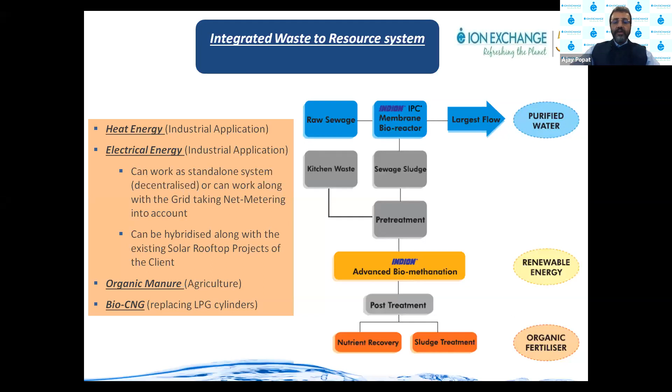You would have a substantial portion of renewable green energy through the biomethanation process integrated in this treatment technology, and whatever is the residual is rich fertilizer. I qualify it as rich in terms of the amount of nitrogen and phosphorus content in this residual. The energy could be heat energy used for industrial application, or it could be electrical energy. And this is how the whole concept is applied.

Let me take you through the salient features of each component of the integrated waste management, beginning with the IPC, the integrated permeate channel membrane.

It's an innovation in MBR technology as it combines the advantages of flat sheet and hollow fiber membrane systems while eliminating the disadvantages of the classical flat sheet MBRs. The disadvantages were that they were not backwashable, their packing density was less, and their operating flux rate was no different than hollow fiber or any other MBR used. This put a serious limitation on what was otherwise its strength area, whereas compared to hollow fiber, it was much easier to operate and maintain in a very difficult regime in which it was applied.

So it uses a first fully backwashable membrane, which can withstand a delta P of more than about 2 bars. Like all MBRs, it's extremely compact, requiring significantly lower area compared to conventional MBR because of the high flux rate this membrane system offers. And of course, like all MBRs, it is available in a modular design.

So the key features of this IPC flat sheet are improved fouling resistance, and the flux yield is significantly higher than conventional flat sheets - almost about 100% more. So if one designs an MBR to treat sewage with a flux rate of about 25 LMH, our experience in the field has been that you can easily design the systems at about 45 or 50 LMH.

Once the sewage is treated, and if you take the sludge - and that's where we want to treat the sludge coming out of a sewage treatment process, it need not be from an MBR, but in this concept we have integrated MBR along with treating solid waste - the sludge which comes out of the sewage treatment process, in this case IPC MBR, is then combined together with the organic kitchen waste. So this is segregated organic kitchen waste, and the homogeneous slurry, after pre-treatment, is fed to a unique anaerobic digester.

This is a solid digester where the organic solids are degraded through a series of biochemical reactions common to anaerobic processes, beginning with hydrolysis, acidogenesis, acetogenesis, and methanogenesis. The difference here is that this is a solid digester with an extremely high organic volume loading rate, and it can tolerate solids from about 12 to 16%. This is the unique differentiator in the digester design.

One can produce methane or biogas with a methane concentration of 65 to 70%, and subsequently the gas can be cleaned to reach up to about 90%, or even up to about 99%. And the digestate is a rich fertilizer.

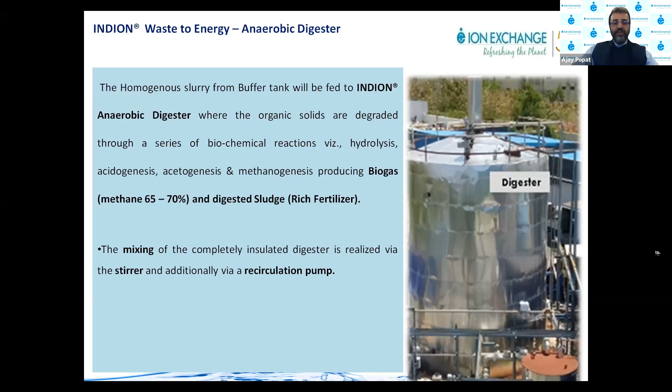The biogas generated by treating sewage sludge, or even sewage along with the organic kitchen waste, is stored in a biogas storage tank or a balloon. One can use additional moisture traps and H2S scrubbers to remove the corrosive H2S in case the biogas is going to be used for power generation.

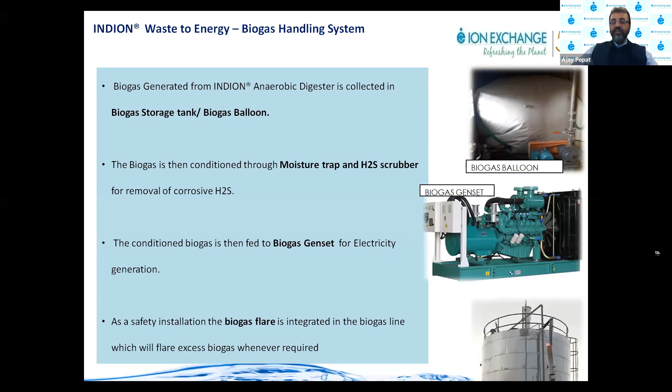It is then fed to a genset for electricity generation, like any other anaerobic waste treatment to electricity production. And all the safety required, in terms of biogas flare and automatic flaring of excess gas, is all built into the design of this system.

Integrated with this liquid and solid waste treatment is the odor control system, which is also completely automated. It captures the foul odor which comes during the transfer of sewage, solid waste, or sewage sludge, in case you want to use sewage sludge along with organic kitchen waste. So the whole environment laden with foul odor is completely insulated from bad smell during the process and operations, by capturing all the odor into an odor control unit, which works on a simple principle similar to how we work with biomass in attached growth processes, in an activated sludge process or an MBBR. This media is where the biomass is grown, and as you'd see, the odor-containing air is induced along with water and sprayed over the biomass media, where complete destruction of the odor-causing compound takes place.

This is also very widely used to treat VOCs in case of industrial effluent. So the system comes integrated with a ventilator, a scrubber, an air distribution system, a biofilter, and a complete control panel. So like the IPC and like the INDION anaerobic digester, this is also a completely automated system.

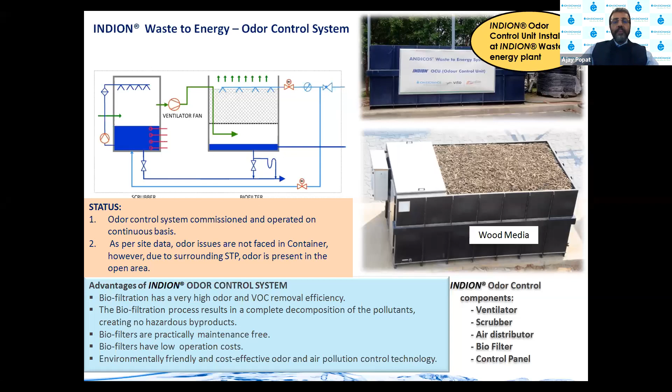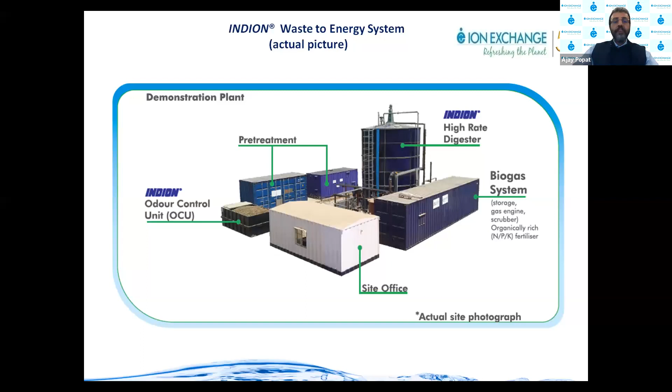Installed and working for the last 2 years, the features of this demonstration plant: it can treat sewage sludge of about 100 liters per P equivalent per day. It can treat kitchen waste equivalent to 300 grams of P equivalent per day. And the sewage sludge output from this amount of treatment is roughly about 2,000 to 6,000 kg per day, or 2 to 6 meter cube per day, with 1% consistency.

So you don't require to de-water this sludge. This unit accepts organic kitchen waste of about 900 kgs per day. So 2 to 6 tons of sludge with 1% consistency from the treatment through IPC MBR, and about 1 ton or 900 kgs per day of kitchen waste. This combination produces 65% biogas, almost equivalent to about 10 Nm cube per hour, converted to a gross electrical output of 20 kilowatts per hour, and a digested sludge or fertilizer of about 493 tons per year.

These figures are important because while we are recovering resources while treating the waste in an integrated way, these become very important outputs in terms of calculating the payback on such investments. Because at the end, we would also like to address the importance of recovery of investment. With this sort of recovery, and for this size of plant and multiples of this particular plant, the payback of the system easily happens in about 5 to 6 years, depending upon the cost of electricity, etc. Generally for waste management, we do not look at paybacks because our primary objective is to treat the waste in order to meet the standards laid down by the authority, and to have a sustainable practice in our operations in whatever way we do. But still, the technology had to be conscious about the payback, and I'm very happy to say that it gives a very attractive payback on the investments.

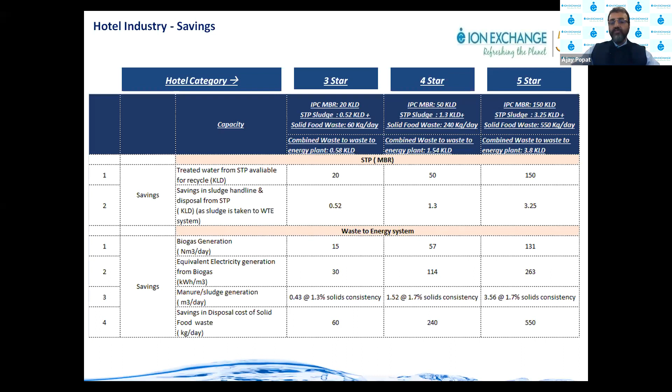And of course, there is a saving in terms of disposal cost of solid food waste. So when you apply all these savings to the investment on the integrated waste-to-energy process in the hotel segment, the payback is anywhere between 4 to 6 years.

A similar case study is also done for residential complexes with 200, 300, or 500 flats, each occupied by about 5 people, generating in a 200-flat complex close to about 100 KLD of sullage and sewage liquid waste, and close to about 240 kgs per day of organic kitchen waste.

Similarly, in a 300-flat condominium or residential complex, one would generate about 150 KLD of sewage and sullage, and the combined waste-to-energy plant requirement would be roughly about 4.46 KLD, and so on for the 500-flat condominium or apartment.

So these are the figures in terms of savings: recovery of water, savings in disposal cost, savings in electricity production, and savings in solid waste discharges. Once again, in the case of hotels, here also the payback comes within about 3 to 6 years.

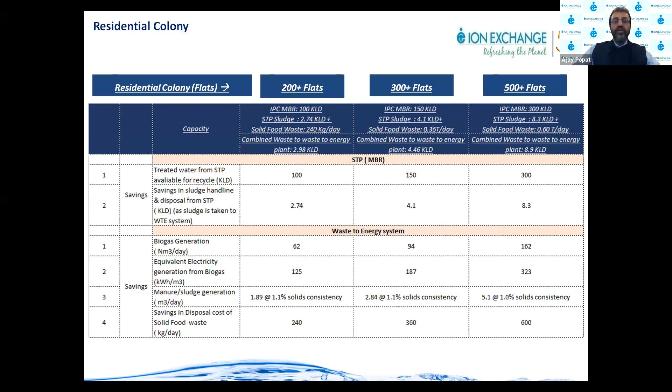In fact, it's about 1 year lower here because of this. So this is the way one can manage holistically both solid waste and liquid waste, and it provides a payback on the investment, apart from meeting the goals of sustainability, not only by treating waste but also by recovering resources.

So waste is the new gold, and thank you very much for listening to this wonderful concept that we have put up now commercially based upon our 2 years of demonstration, which any one of you who wants to visit, subject to COVID restrictions, can just write to us and we can organize your visit to this unit, which is still operated and maintained by us.

I'm going to present to you today on closed circuit reverse osmosis, or in short, CCRO. This is a new company we have recently acquired. It was a startup just 5 years ago, and now it is part of the DuPont Water Solutions umbrella. Let me briefly introduce DuPont Water Solutions. We are a component provider for RO membranes, NF membranes, ion exchange resins, ultrafiltration membranes, and some new additions to our toolbox are MABR, or membrane aerated biofilm reactor, MBR, which is membrane bioreactor, which Ajay was just talking about, and then we have the CCRO technology, or closed circuit RO technology.

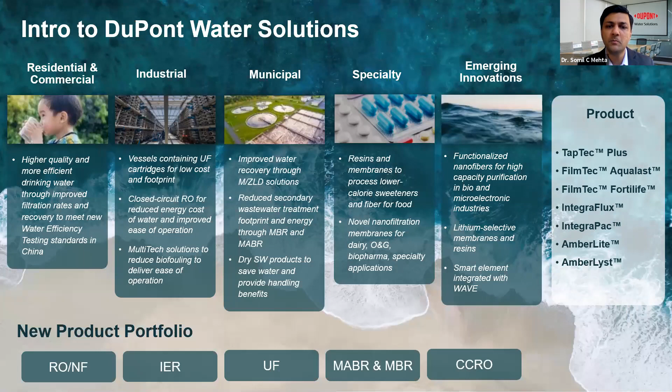Today we will specifically speak about CCRO and how it changes the game in the reverse osmosis process. I will be a little provocative today in my agenda, where we want to see why this particular technology changes the game, how it is different from conventional RO, and what benefits it actually brings to end users like many of you. So let us jump straight into the technology without any further ado.

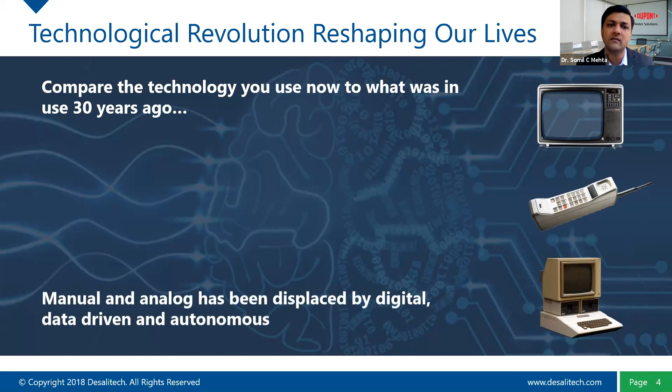If you look at the technologies around the world, there have been several innovations in the last decades. Earlier we used to use a telephone, and a huge television which was a cubicle box. Back maybe 20 or 30 years ago, there was only one channel, Doordarshan. Today, even some existing service providers that give you a regular channel are getting out of the game, and now we have Amazon Prime or Netflix and these types of revolutions coming in, where users can do whatever they want at their will and at their speed. But when it comes to reverse osmosis technology, are we really still stuck in the conventional way?

If you look at the reverse osmosis on one side and the concept of a refrigerator on the other side, what if you have a reverse osmosis plant that you just switch on and never have to worry about until it is broken? Today, we have so many headaches managing a reverse osmosis plant. Whether we have done a CIP properly, are we maintaining our recovery properly, are we monitoring our parameters properly, is there any fouling tendency in our water. The list can go endless.

But what if there is an automation or technology that will do everything on its own? All you have to do is switch it on and then monitor the system on a computer panel. The system will automatically adjust. You don't have to do anything. You just set the parameters you wish to have, and it will operate automatically until its life is over. Does it look like a dream to you?

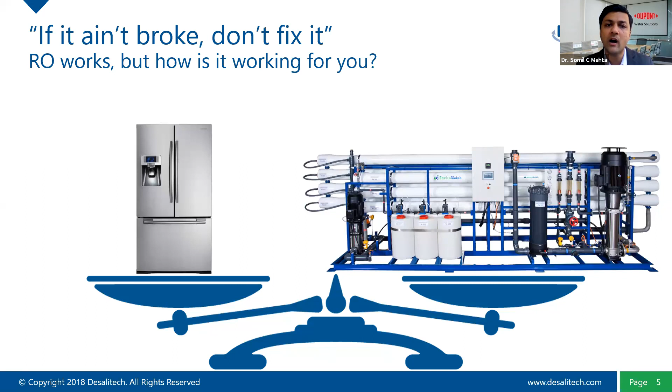But it is not. Let me assure you. I think the technologies are here today which can help you achieve that. So I'm going to show you how it is done and what are the benefits it will bring to you.

Eventually, if you're operating the system automatically, you can define what kind of recoveries you want, and the system will bring you that recovery. You're not stuck to the flow parameters in each stage. So one stage you can only take 50% recovery, second stage only 75% or 80%. You're not stuck to those kinds of boundaries anymore. You define 90%, 92%, 70%. Of course, you have to be judicious about the overall salt solubility and thermodynamic limitations. But what we can show you here is that the system limitations can be removed.

So now you can reduce the water consumption. If your feed water is very valuable, you can do that. If your waste management is an issue, now you can reduce your wastewater by a significant fraction by achieving a very high recovery. The overall process, if you look at the conventional system with the same kind of recovery and this CCRO system with the same kind of recovery, you will see a dramatic energy reduction.

The energy reduction obviously depends on the nature of the system you're operating in. If you are using brackish water, very soft water, the amount of energy saving will be lesser because the pump energy isn't required so much. Whereas if you go to the seawater side, the amount of energy saving is tremendous.

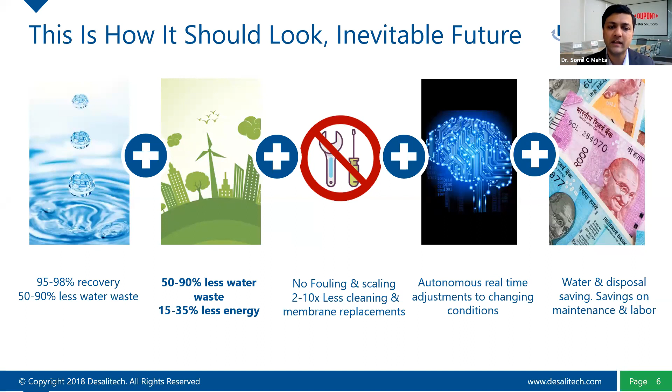Let's get into the advantages of CCRO. It is very easy to operate because everything is self-controlled. You just have to put in a programming logic and it will automatically control those parameters as per your wish. You can define and change those parameters as needed. Of course, the deciding power is still in your hands, but the equipment is going to abide by what you say.

The system is very reliable. You turn it on with your set parameters, and for maybe a year, maybe two years, almost nothing happens. The system keeps on churning the water as per your requirement, while controlling its scaling and fouling tendency. There are some routine checkups you may have to do, but it will reduce those checkups to a much lesser frequency. And the system is very efficient.

Of course, if your water is very hard to begin with, there's only so much recovery you can take depending on the thermodynamic limitations. But if the water is soft, and if you wish to go to 98% recovery, there are systems in operation that operate at 98% recovery, where you take it to almost a zero liquid discharge type of setup. And that is also possible.

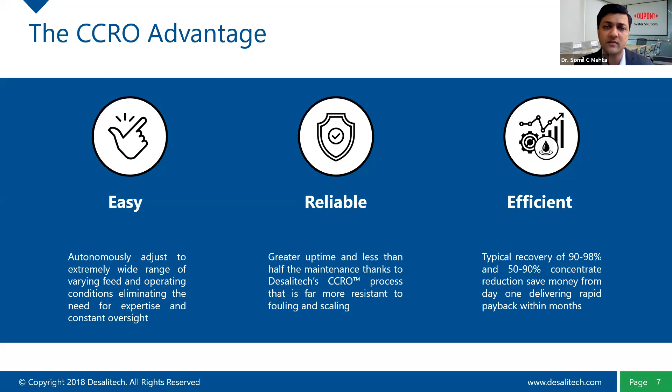So let's look at how CCRO can do it. I hope the why is compelling, so I'm sure the how would be even more interesting for you.

This is how a conventional system works. You have a conventional two-stage system. Your feed water comes from one side through a high pressure pump, goes through the first stage, and the concentrate is fed into the second stage, giving you a concentrated brine.

The system is almost like something welded in stone. Once you have designed it, this is how it will operate under whatever feed or conditions you have. Conventional RO systems are designed for a picture in time—it is not dynamic enough to amend itself to your changing feed.

Everybody knows our feed water is A today, but tomorrow it can be B. Your conductivity can change, your fouling tendency can change. But once you've invested in a conventional system, you cannot change it, or you cannot change your parameters dramatically without affecting efficiency.

So the pain points of a conventional system: you have a set recovery, and that set recovery is what you get. There is a fouling tendency concentrated towards the later part of the system. If you have biofouling, generally the lead elements of the first stage will foul.

If you have organic fouling, it will happen throughout the system. If you have scaling or other salt precipitation, it generally happens at the tail end of your system, and it's very concentrated in that particular region.

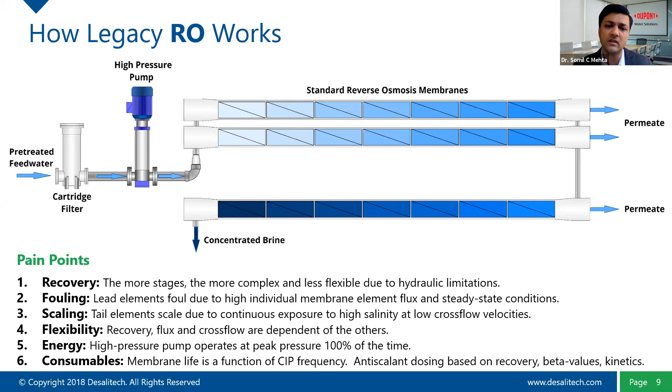Let me show you what CCRO is. CCRO, as the name suggests, is closed circuit RO. Basically, the RO operates in a closed loop. This is the most fundamental principal difference between a traditional RO and a CCRO.

The benefit is, depending on how many loops or cycles you take, you can define the recovery of the system. The recovery is not dependent on the number of stages, but on the number of cycles that you take for your water.

The flux: under a conventional system, you can only have a certain limit of flux or cross flow of water over your membranes. However, in CCRO, you can define cross flow on your membranes at an order of magnitude higher compared to a conventional system, and this significantly reduces your fouling and scaling tendency.

The flux of the system really depends on the high pressure pump. And here again, you can control the flux of the system, which is slightly higher compared to a conventional system.

Moreover, the system is very flexible because you have adaptive controls. You can adapt your recovery on the go. For example, your feed water might change from seawater into river water, or river water into seawater. A traditional system cannot adapt to this kind of change.

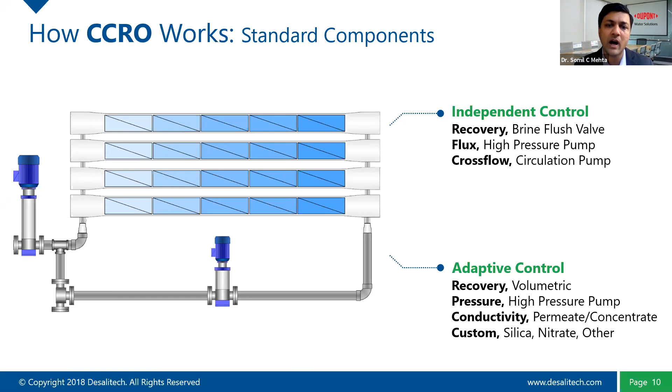So there are numerous advantages to CCRO technology compared to conventional RO. Let me briefly show you how it works in schematic diagrams.

Let's say you have a first operational cycle, or step one, where your feed water is coming in. In the first cycle, the feed water passes through the membrane systems. Instead of throwing away the reject, you recirculate it back along with the feed water. There is a circulation pump that controls the cross flow.

So the pressure requirement here is very low, only on the order of 1 or 2 bars. There is a high pressure pump that actually pushes the water through the membrane. Because you have a single stage system, the high pressure pump requirement is also relatively lower compared to 2-3 stage systems where you have to push the water all the way through. Your footprint is also much smaller, and your membrane efficiency is much higher.

As the water gets more and more concentrated, the color of the membrane here indicates the salinity across it. There is a slight polarization from the first membrane to the last one, just like a conventional system, but as the cycle continues, the later cycles will have a much darker color compared to initial cycles.

At some point you hit your trigger, where the brine flush valve opens up. This trigger is defined by you—whether it's based on recovery, scaling tendency, fouling tendency, conductivity, whatever. Once that happens, there is a brief flush cycle where the concentrate is flushed out, depending on how you define it—whether the entire water is flushed out or only partial water. Then you go back to step one and the process continues.

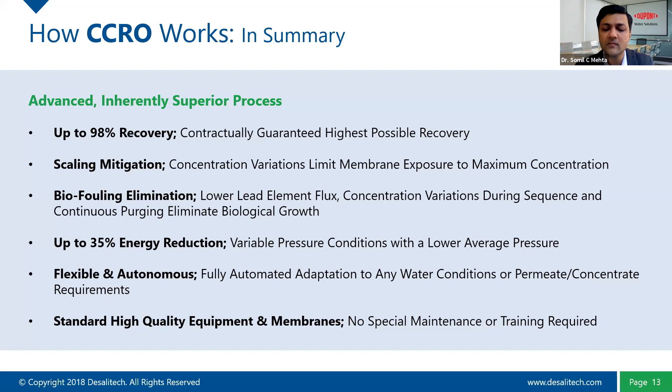Let me quickly get into some of the real cases where customers have had benefits. These are some of our partners who already have a significant footprint of these kinds of systems, and they are currently using them very, very successfully. Let me get into a few select case studies.

I saw somebody in the audience from Coca-Cola. We have a plant for Coca-Cola in Asia, and their main pain point was reducing footprint. Here you have a CCRO system with a picture showing a very small footprint. These are 8-inch RO elements, so you can almost extrapolate how big the plant is. With a very small plant size, it's achieving almost 91 to 97% recovery, depending on the feed water fluctuations over time.

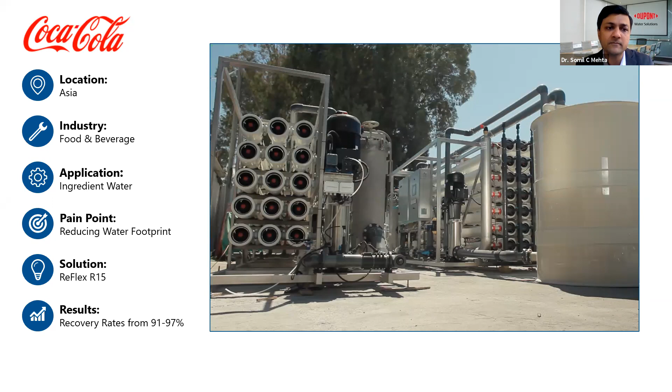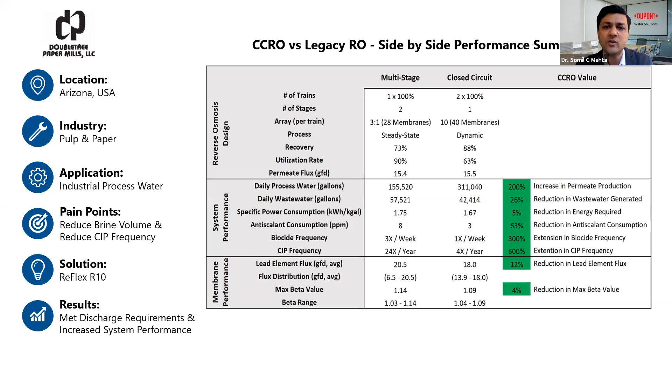Here is another example where the challenge was efficiency—basically brine reduction and CIP frequency reduction. This is a pulp and paper company in Arizona called Doubletree Paper Mills. You can see the overall process parameters for a conventional multi-stage or two-stage RO system versus a closed circuit system.

Let me directly focus on the benefits. The daily water production is almost double compared to the conventional system. Now look at the number of membranes—you're operating with 28 membranes. If you had to double your water production, you'd have to go to almost 56 membranes, in theory having two systems. But here you can do so with a much lesser number of RO membranes.

The daily waste generation is also significantly lower because now you could increase your recovery from 73% to 88% average recovery. The specific energy is also 5% saved. The anti-scalant consumption is significantly reduced, and look at the biofouling tendency and CIP frequency—reduced by 1/3 and 1/6.

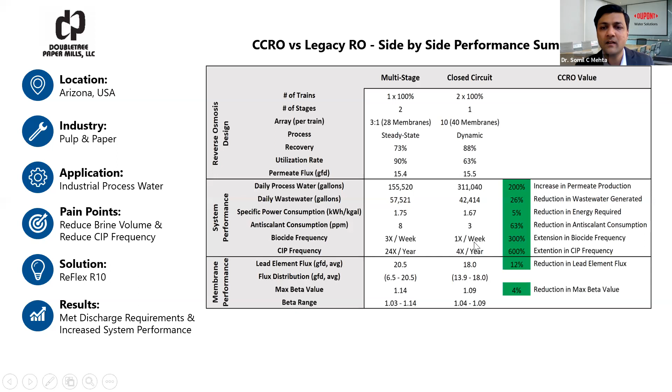How do you adjust that? In CCRO technology, when the trigger point is defined based on the conductivity in your reject stream, the system will automatically adjust the water recovery depending on when the reject stream hits that particular conductivity. For example, at 500 ppm TDS, you can almost achieve 95% recovery, whereas when your feed conductivity is 3,500, the system automatically brings it down to about 78% for a brief period of time, and then automatically boosts it up again.

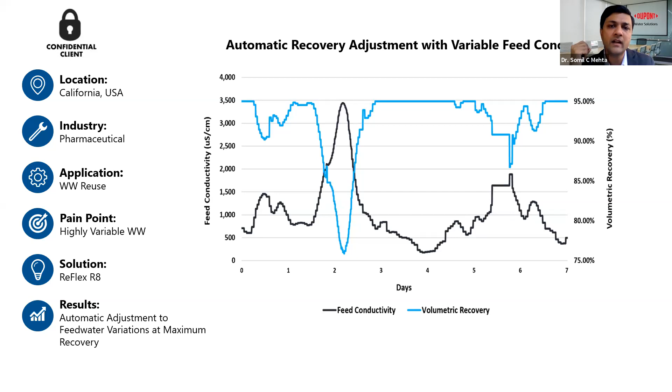Finally, maybe a last case study here, with another chemical company based at Lion Elastomers, where the objective again was to reduce CIP frequency. Here we have this system in operation for 16 months now, and there has been no CIP till date. It is operating at higher recovery compared to other conventional systems, with smaller membrane footprint, much more water saving, but also significant CIP saving.

So with that said, as I mentioned, this is a relatively new technology. It is patent protected—there are more than 140 patents on this technology to very well cover the technology confidentiality. At the same time, we have references across the globe with more than 250 systems working very successfully. And 80% of these customers have come back to us with repeat orders because they like the technology so much—there is so much efficiency that they want to continue to leverage this.

Vishal Wagolikar is asking, what is the max feed TOC/COD range for the CCRO technology for optimum organic fouling control?

Let me answer this question in a more generic way. A CCRO system is a new process or a new way of operating a reverse osmosis system. It is not a magic by itself. So whatever conditions apply today in terms of theoretical limits to RO systems, whether scaling tendency, salt concentration, fouling tendencies, or organic concentration levels, all of them will still apply to CCRO. But within those limitations, CCRO as an operating methodology can significantly improve the efficiency of current systems. For conventional systems, defining a ppm for BOD/COD is very difficult because it depends on the type and nature of the COD and BOD.

It depends on the type and nature of COD and BOD. But depending on your experience with your current system, you can implement that same experience with CCRO.

One more question from Arun Kumar Agarwal: is there any limitation for adopting CCRO technology vis-a-vis flow, quantity, temperature, etc.?

When using CCRO technology, just like any RO, there should be a bottom limitation below which the process may not be efficient. For example, if you have a system of 25 or 50 meter cube per hour, below that the system may not be very efficient. I think 25 is a good number, because the system will require certain cycling or efficiency in order to operate well for you.

So it's my pleasure to talk to you guys and share some views on common effluent treatment plant. And normally I prefer to talk about success stories, so that would be the way I would be talking in this presentation.

Sir, did you get the control, sir? It's already passed to you. No, it says you cannot control Ramkumar's screen. Just one second, it's not yet triggering. Okay, you can control Ramkumar's screen now. So okay, I think it will trigger.

So why common effluent treatment plant? The very simple answer is because I cannot afford my private jet. Everybody would like to have its own wastewater treatment plant, but there are many reasons why they cannot afford it. Some of the reasons are they have very small business, they may be located in an industrial cluster with very small land, their effluent volumes can be very low, and there could be several reasons why they cannot afford a wastewater treatment facility. But the bigger question is, can it be allowed to pollute and send the pollution out? The very common answer by all the governments, institutions, and authorities would be no, you cannot do that. So for such sector, planners suggested a common effluent treatment plant, and it was covered under MOEF guidelines issued in 1991.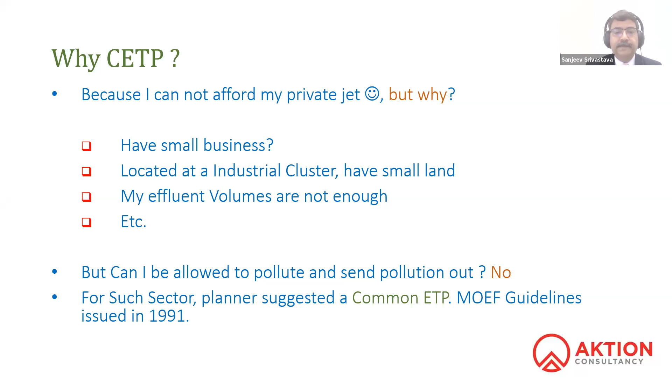So what is a CETP? CETP is a concept of treating effluent by means of collective effort. We understand an organization like Amul, by collective effort, they collect milk from all the farmers and channelize the milk and its products to all the consumers. On the same concept, CETP has to collect effluent from its various suppliers of effluent, treat it, and send it.

This concept is very similar to a municipal corporation of a city or town treating sewage for all the individual houses. We have in our municipalities houses, colonies, infrastructure buildings, malls, restaurants — they all can give sewage to a municipal corporation, and the municipal corporation collectively treats this sewage. But there is a big difference between CETP and sewage treatment plant. In my subsequent presentation, we will try to understand that difference.

Increasingly, new industrial development corporations and infrastructure companies who are creating mega private industrial hubs are promoting industrial grade waters and treatment of effluent as a common facility, mainly to encourage investors. So CETP would be a way for new industrial grade water as well as treatment of effluent for the mega industrial hubs, which are private, and would be a good business opportunity for many.

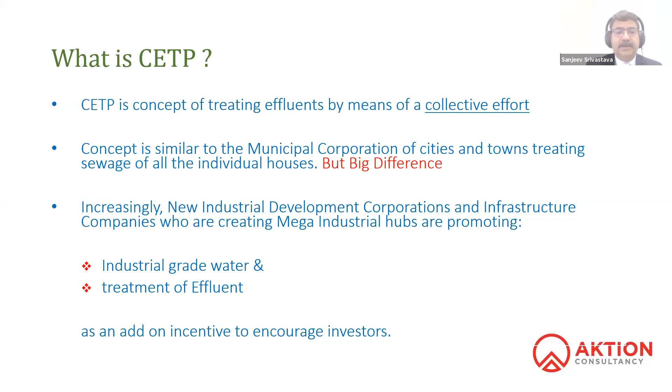What are the objectives of CETP? Let's go one by one. First, it allows small and medium enterprises to focus on their core business. Believe me, nobody's business is to take up wastewater treatment, but wastewater is everybody's responsibility. So the SME sector understands this responsibility, but if we allow a CETP, that will help them concentrate on their core business and let the effluent be managed by someone else.

It also achieves economy of scale in waste treatment because many of its members may not have enough effluent. I very often get inquiries from people — they say, I have 3 meter cube per day effluent or 7 meter cube per day effluent, what do I do with that? The person is showing responsibility, but there is no economy of scale in managing his waste treatment. Then to solve the problem of space and land, small entrepreneurs do not have big facilities or lots of spare land to give, so the CETP can help them.

And finally, the fourth one: homogenization of wastewater for a heterogeneous industrial cluster. Now this is a very interesting point, and this is where I will remind you of my previous slide when I say the concept of CETP is similar to that of a municipal corporation, but with a big difference. The big difference is the heterogeneity of the industrial cluster, because in a single cluster somebody may make pharmaceutical products, somebody may make alcohol, somebody may make paint or varnish, and somebody may just make bread, cake, or some cereals.

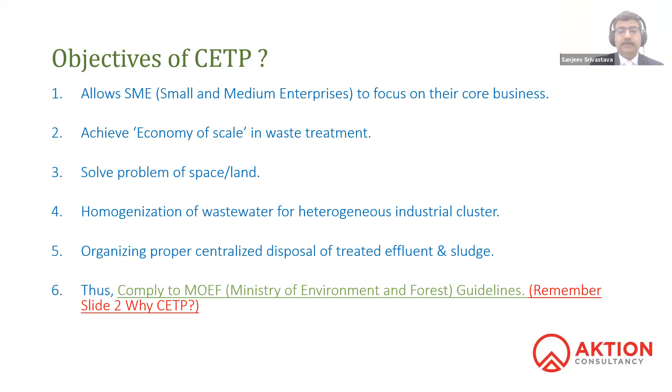So let's do a CETP step by step. The first and foremost thing needed for making a CETP successful is management. The role of the government on board is increasingly being questioned these days, because management is typically done by a local industrial cluster, but nowadays government is also talking about trying to co-manage the facilities.

Money is important. We need funds, grants, capital expenses, operating expenses, and a very important one called revenue, because the CETP has to be sustainable in nature. It cannot survive only on funds and grants, so revenue is very important.

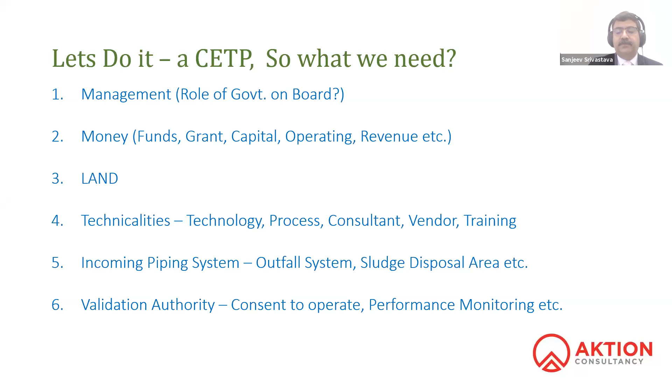Land is important. Technicalities - a lot of technical things like technology, process, who is the consultant, vendors, trainings, and so on, so many technicalities are involved, after all it's a technical subject, wastewater management. The incoming piping system, how the effluent will come to you; the outfall system, how the effluent will go back to the river; and the sludge disposal area - these are areas where someone has to put his brain. And finally, a validation authority, who will give consent to operate and how we will monitor the performance of the facility. So these are the things which need to be done.

You cannot control Ramkumar's screen. So Ramkumarji, yeah, you please push. Okay. Sir, are you getting access now? No, it says you cannot control. Ram, can you check and see? Ram, you can click for me. Don't worry. Ram, Yeah, can you hear me? Yeah, it's okay. It is now controllable.

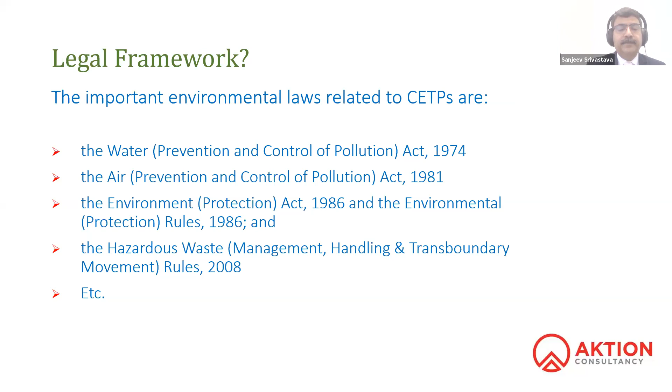What is the role of CPCB? It actually provides guidelines and gives consent to operate. It also reviews and monitors if performance is not in line with consent.

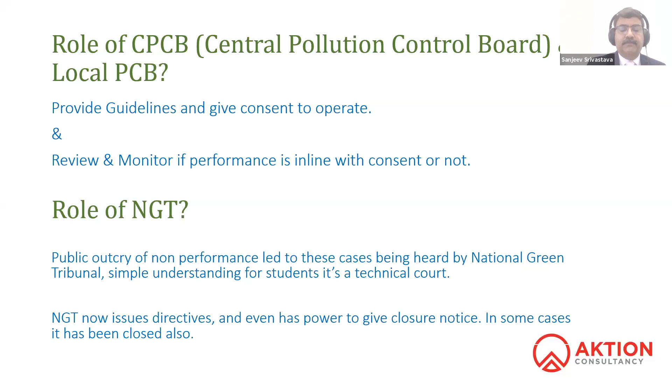What is the role of NGT? A new entity comes as NGT. What happened was, in spite of all these efforts by MOEF authorities, CPCB and PCB, there was a public outcry that several of the CETPs were not performing. So now the NGT, being a technical body, comes into picture to really listen to them. NGT's role is to issue directives and even has the power to give closure notices in case some people are not performing as per the expectation of Central Pollution Control Board or Ministry of Environment and Forest.

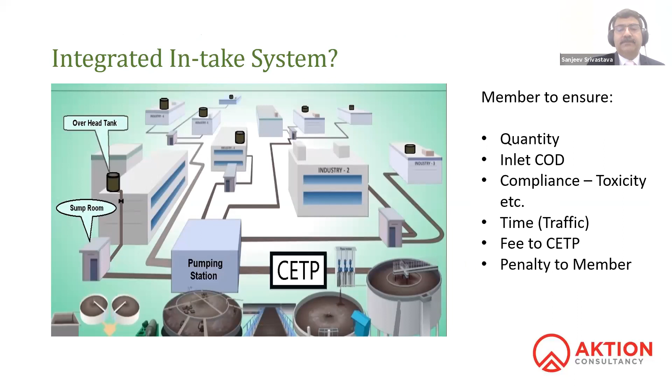What are the challenges? To be honest, there are many challenges. Let's forget them and look back at the solutions. So solution one is that one has to have an integrated intake system. What I mean is, a member of the common effluent treatment plant must commit on quantity, COD, compliance, time, fee to CETP, and penalty to a member. That's not enough. How do you do that?

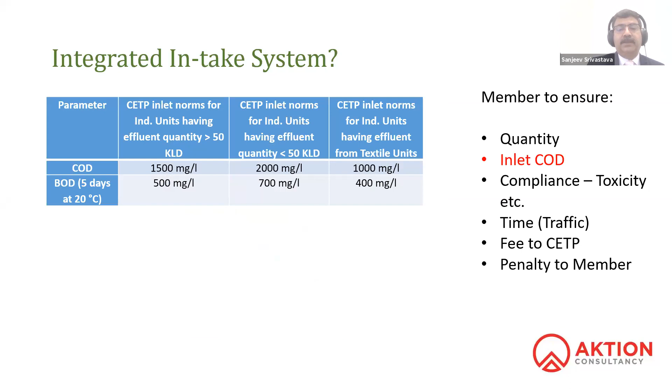And this is very, very important. The next important thing is the time and the traffic, because everybody cannot put the effluent at the same time. So what we talk about is that there have to be some kind of sumps in some rooms where, depending upon the user from a particular industrial cluster, they will have set timings when they will give effluent to this sump, and this sump will be pumping the effluent to the main common effluent treatment plant.

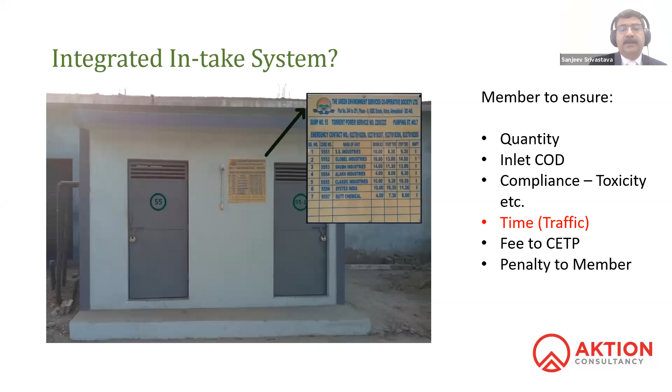What is the integrated intake system? For example, in one of the projects, there are 94 sump rooms with a maximum of 8 connections. If you look at the picture, these 8 connections also have some kind of valves, and then it is automated via a flow meter. So these valve openings and closings happen automatically, and therefore one is able to confirm the quantity and time for a particular user group. So this is something which is important.

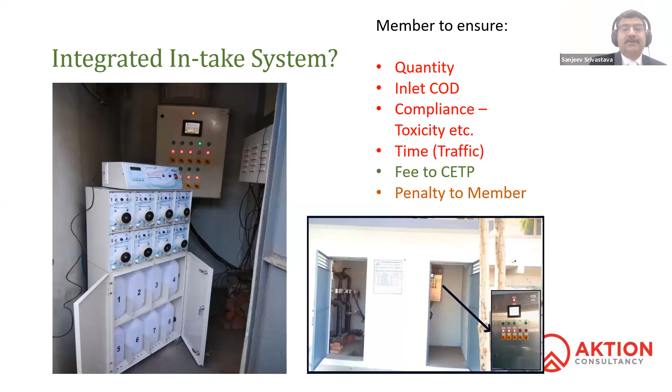In the same way, there are auto samplers installed in these kind of sump rooms where samples are collected. You can see some numbers written in the picture: 1, 2, 3, 4, 5, 6, 7, 8. So at a particular time, who is giving what kind of COD, and whether the effluent is toxic or not, that can be tested. So if the effluent is tested, we talk about penalty to a member, and depending upon the COD, we talk about fee to CETP.

The next level is the integrated intake system. We will check everything again at the CETP inlet, that whatever has been pumped through the various sumps is actually the same thing which is being received. So in between, there is no one trying to put up his own pipe and give some kind of effluent to contaminate the feed. Simply put, we find out if there's somebody with unauthorized access to the piping, which is actually out of the CETP premises.

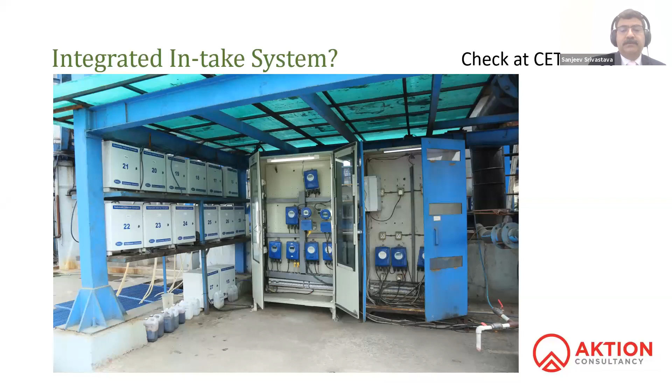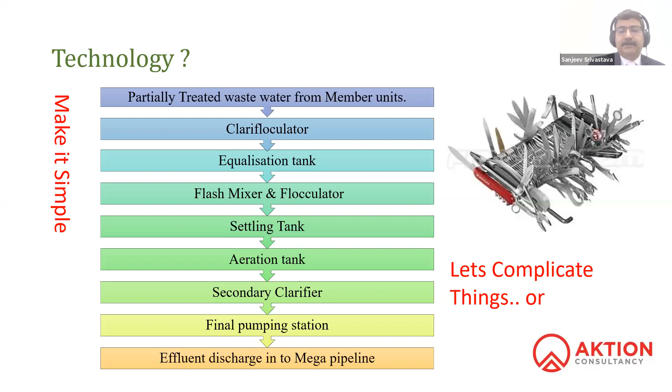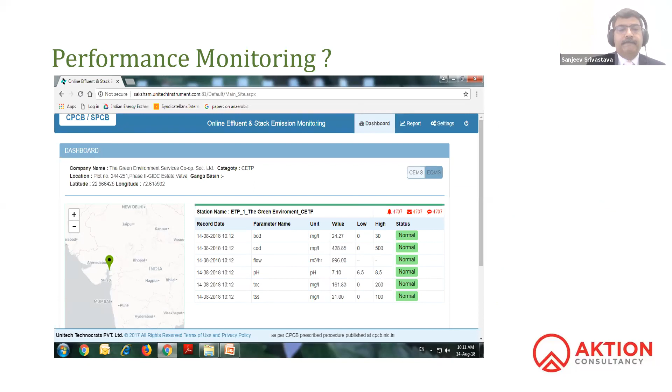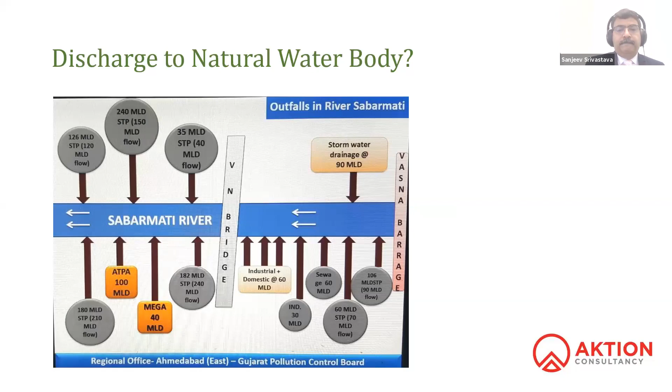Now, how do we design a typical CTP plant? I will just run through some points.

Quantity of wastewater generated and characterization of wastewater is important. Inlet feed water quality is very important. Wastewater treatability should be discussed and talked about. It should be low in footprint. Mode of disposal of the treated effluent should be agreed, and disposal of the sludge should always be decided. We should also look forward towards recycle and reuse of the treated water.

And finally, very important, the process must be designed on a modular and scalable option with a bit of flexibility. What are the various options in all the books? You have to go preliminary, primary, secondary, and advanced, depending on your budgets and what your treated water quality aim is. India has some good CETPs, two or three I know, going into the advanced area of COD polishing using tertiary treatment.

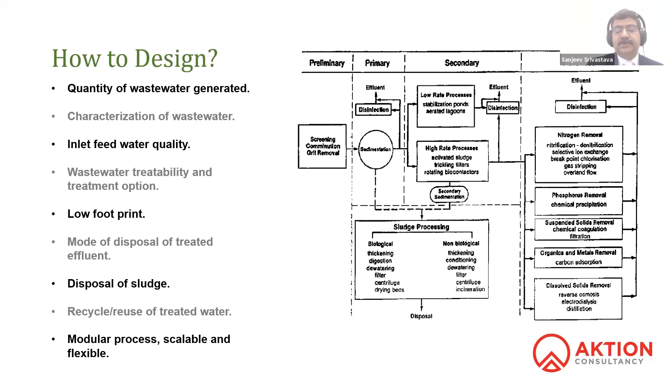To conclude my presentation, first and foremost, there are many agencies working into it. There are two slides I've shown you: one from the Gazette of India Extraordinary, published by some authority, and one from the ISW standard of discharge. But there is a mismatch between what is expected and what is to be treated. So my conclusion is that in this CETP and wastewater management area, on a centralized basis, we should have some kind of nodal agency, something like the Telecom Regulatory Authority of India, a single point responsible authority managing all telephone or data operations in India. Similarly, wastewater treatment plants also need some kind of nodal agency.

Secondly, technology is never a problem. A lot of time people say technology is not available. So I can assure all my viewers listening to this, technology is never a problem in any of these things.

Rajkumarji, can you just click it, since you are controlling the screen now?

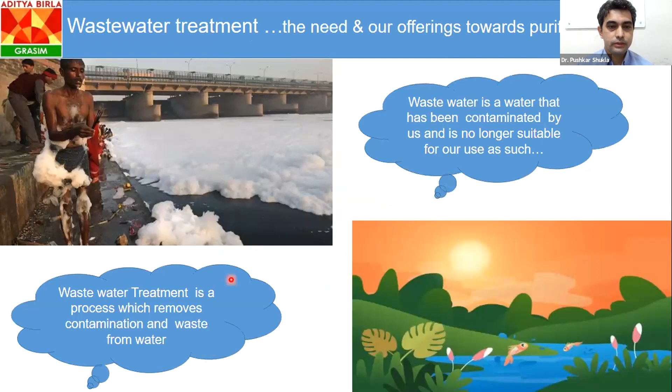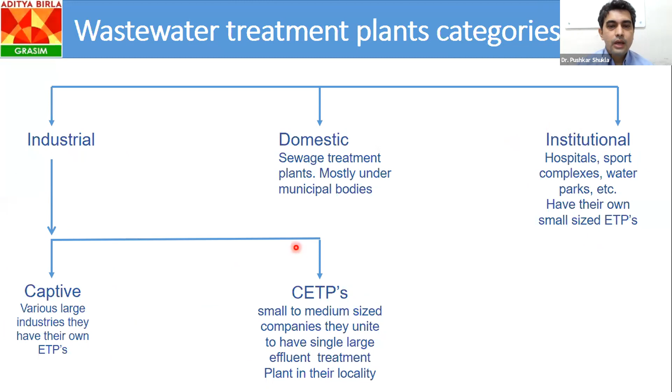I'll be speaking on the customized performance chemicals which Grasim has for wastewater treatment. By definition, wastewater is water that has already been contaminated and is no longer suitable for any further use unless we treat it. Treatment is in our purview as human beings. Depending on where the effluent or wastewater is generated, there are many methods to treat it. For domestic, we have sewage treatment plants; for institutional, they have their own ETPs; and for industrial, obviously captive plants as well as CETPs. We have just seen how important CETPs are for our small and medium-sized companies.

On the basis of water consumption, there are a few sectors which are very water intensive. These include textiles, pulp and paper, rayon grade paper industries, and metal processing. These industries are very water intensive, and mostly they have their own captive plants. In the case of textiles, there are many CETPs.

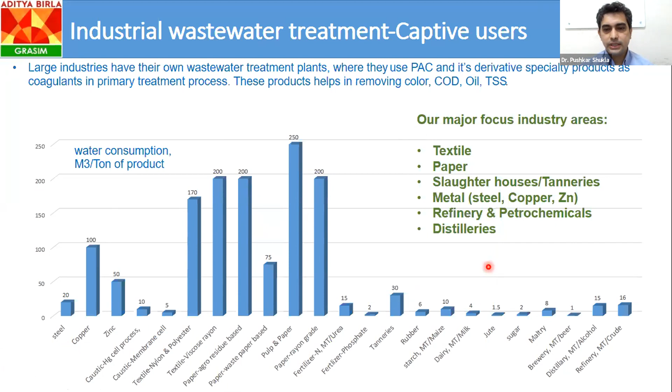So, major focus areas - Grasim has been a manufacturer of PAC for a very long time, but these particular sectors require something more than conventional systems or conventional chemicals. On that basis, we have decided to focus on textile, paper, slaughterhouses, metals, refineries, and distilleries.

To take this further and provide customized solutions, we established a water product development and application development center in 2016, which got DSIR recognition. The main objective of setting this up was to develop new chemicals and new applications, and also provide a complete solution to the customer, adding value to our existing product portfolio as well as to the customer - a win-win situation. We have filed a few patents, and also have strategic tie-ups with DST, NEERI, and other eminent institutes for our product development.

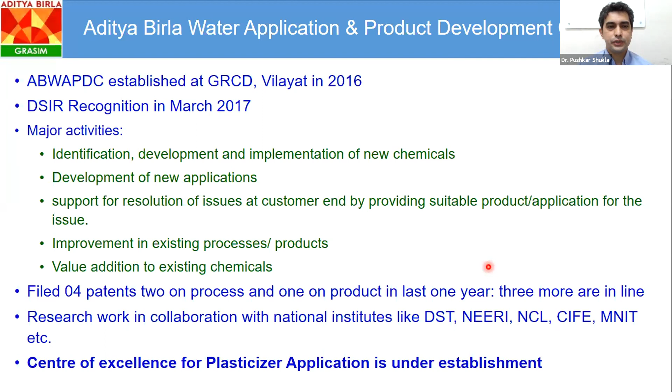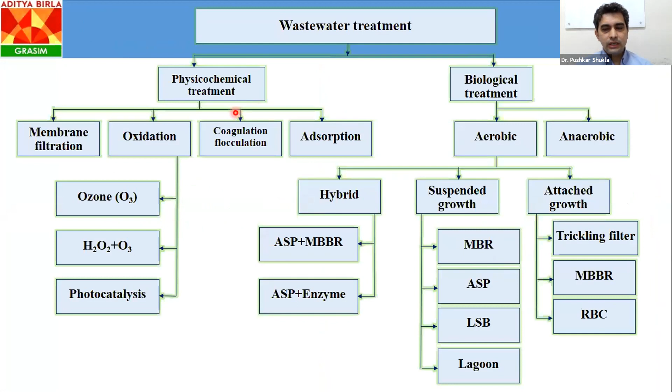So we come to the topic after a brief introduction. Wastewater treatment, as we have discussed even in the previous presentation, is briefly classified into physical-chemical treatment and biological treatment. Of the physical-chemical treatment, several technologies are available, and one which we'll focus on today is coagulation and flocculation - but not the traditional way, the new way.

This brings me to my first case study, from an oil refinery containing oily wastewater. The oil that comes into wastewater, depending on droplet size, is classified into soluble, emulsified, dispersed, and free.

There is a continuous physical treatment system, the American Petroleum Institute Separator, for separating the oil, which comes at the top, and the suspended matter, which settles at the bottom, followed by the tilted plate interceptor, which helps in increasing the globule size and separation of the oil.

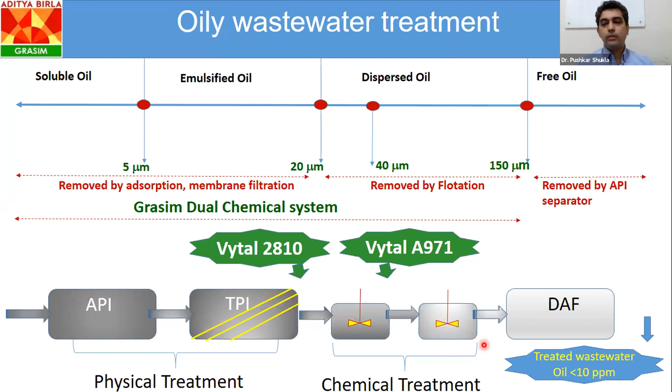Then we come to the chemical treatment part, mainly for the dispersed oil. Earlier, this industry was using nearly 3 to 4 chemicals to achieve the result to improve the performance of the dissolved air flotation. Prior to dissolved air flotation, there was a dosage of around 3 to 4 chemicals. But with our new Vytal 2810 system followed by Vytal A971, we were able to bring it down to only 2 chemicals, and achieve a norm of less than 10 ppm in DAF treated water.

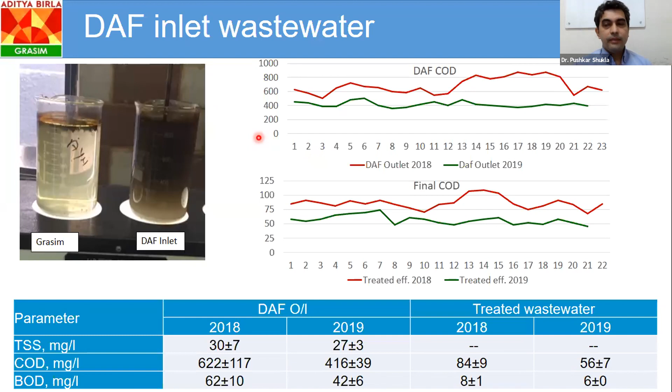So with this system, they were able to achieve their discharge norms as well as increased performance of the DAF, with reduced chemical inventory and costs.

The similar treatment system for separation of oily wastewater was also implemented for an edible oil processing industry, where earlier they were using only lime and de-oiling polymer. The doses were around 6000 ppm of lime and 25 ppm of polymer. From there, it was brought down to only 250 and 3. So this is what a right solution is: you can significantly reduce the sludge generation, increase performance, and reduce your load into your subsequent biological systems, which will obviously give you better performance.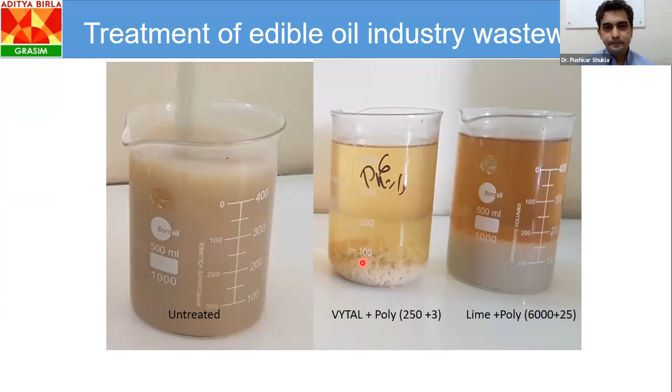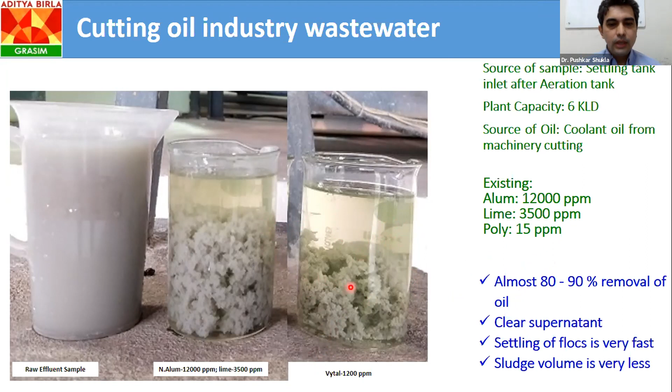We have also implemented a similar thing for cutting oil. This is also emulsified oil coming in, and earlier they were using the conventional chemicals alum and lime. With the Vytal, they were able to reduce it to 1200 ppm, and there was almost 80 to 90% removal of oil. You can clearly see the difference in the color of supernatant, much clearer. Also, the settling was faster, and the sludge generation is significantly less. So lower sludge generation, lower disposal costs, and better performance.

This brings us to the next case study. This is for a viscose filament yarn manufacturing unit. Normally in viscose filament yarn, it is a yarn dyeing process, and usually dispersed pigments are used. In this particular system, whenever there was a color changeover from one color to the next, they would send the residual dye solution straight to the ETP, and this was causing a lot of color in the ETP.

Initially the customer tried our conventional chemicals, which were not able to give the desired performance, so they invited us and we went there. We studied their effluent and thought that this D3 channel, the 200 meter cube per day stream, was only causing the color. When we deep dived into it, we found that the actual problem was caused by only 20 meter cube of effluent, which was imparting color to the whole 5000 meter cube stream.

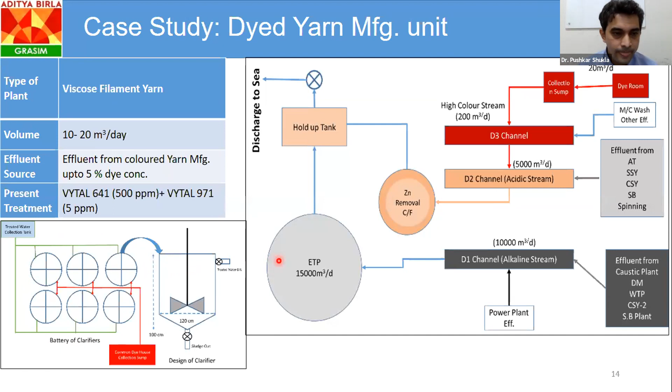So we developed a customized solution for them and also asked whether they could separate this 20 meter cube stream and then go for treatment. They agreed, and they had a battery of clarifiers where this 20 meter cube stream was treated separately before being sent to the ETP. So instead of directly sending this dye bath solution to the ETP, they sent it first to the battery of clarifiers, and then the treated water was taken to the ETP while the sludge was taken to the TSDF site. These are actual photographs taken from the plant.

And you can see there is a significant reduction in color for all the shades as well as the mixed effluent that is coming. You can clearly see nearly 99% color reduction, and significant reduction in TOC, which is also related to COD. So they were able to achieve both the norms for color as well as COD, which was imparted because of these dyes or pigments being used.

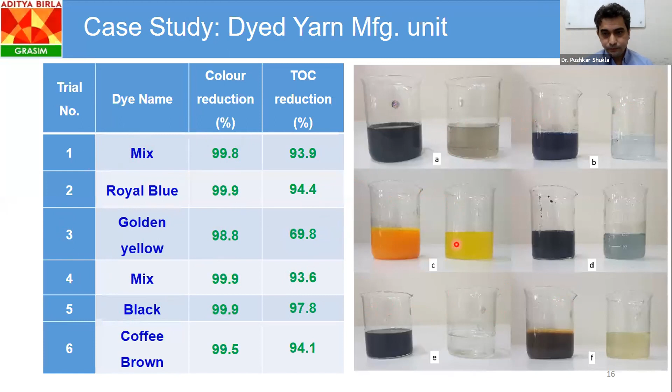This brings us to the next case study, again a textile CETP. My previous speaker has very well explained the need for CETPs. In this particular case, they were earlier not intending to recycle, but now they have decided that they will be recycling a part of this. But the challenges they were facing were high sludge generation, because they were using conventional chemicals like lime and ferrous treatment.

Whenever you use ferrous sulfate, there is a problem that the DO level drops in your biological system because some DO is consumed by iron, and it also gives you a greenish tint always. Since they were using lime and ferrous, there was an excessive load on the RO system they were trying to implement, because if they have to give it back to the industry, the TDS has to be reduced. And also the chemical preparation which they had to do was a challenge.

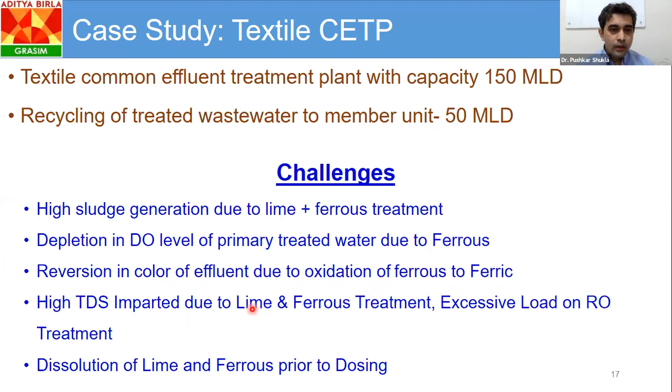So we worked with them for almost 6 months, and after several trials, we were able to give them a solution which was VYTAL CO-18. This is a completely liquid product, so no need for preparation or anything. Lime was added just to adjust the pH in case it is on the lower side. And then this is the plant outlet.

So if we see, they have a complete system where there is primary treatment, secondary treatment, then tertiary treatment, and then the same treated water is being sent back to the industry. We successfully implemented this, and they were able to start the recycling process.

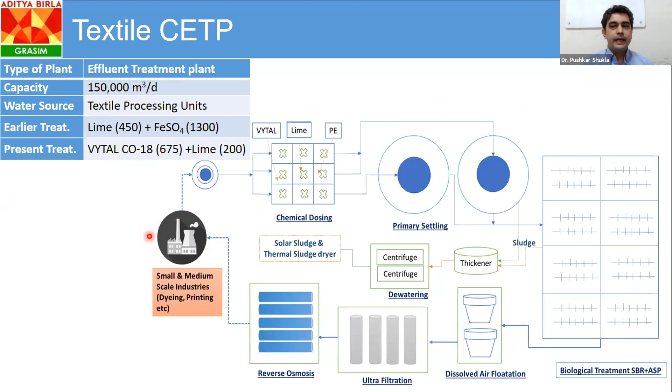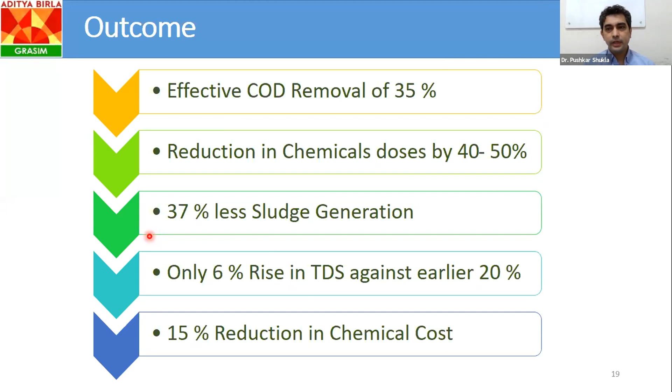The achievements in this case were effective COD removal, chemical doses reduced by nearly 50%, 37% less sludge generation because of elimination of lime and ferrous, lower rise in TDS, and 15% reduction in overall chemical costs. And as they say, happy customers come back for more.

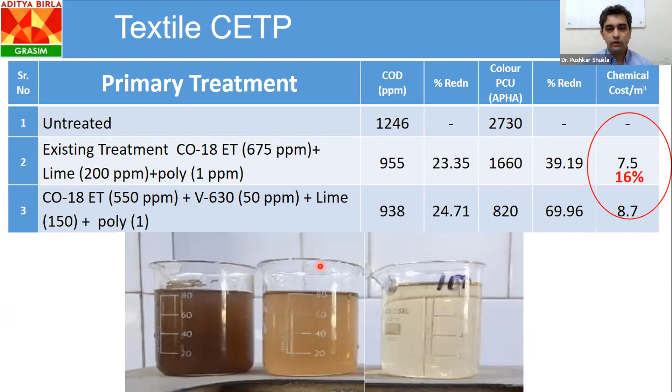Now obviously this comes at a small cost, and considering the volume, the increased cost with this performance was nearly 16%, but the performance was significantly better.

Another example, again from the textile industry. This was a very basic plant, where the only equipment they had was a pump that would pump from the collection pit into the distribution channel, and everything else was operated under gravity, so no moving parts in the ETP. They wanted to go for recycling because they were facing water shortage.

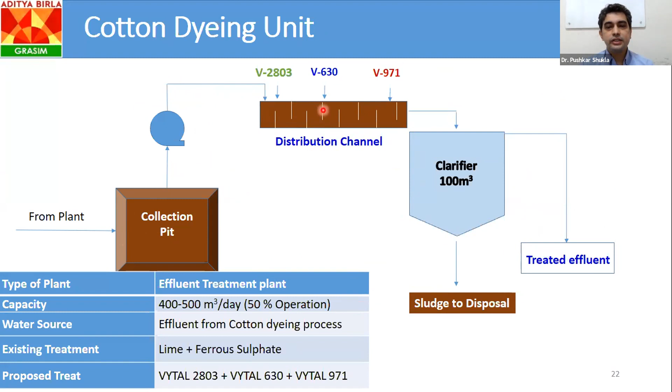Earlier, again, they were using the same lime and ferrous treatment. We shifted them to Vytal 2803, the 630 based treatment system, with no moving parts in the clarifier and only a distribution channel for dosing of chemicals. You can see the results—this is the inlet and this is the primary outlet.

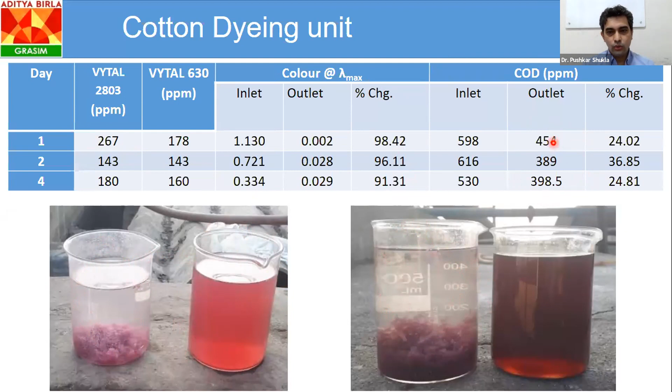So significant color reduction, significant good amount of COD reduction, and very low doses.

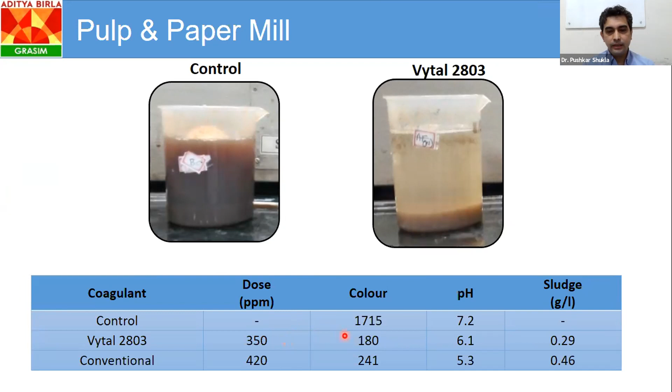We have also done similar treatments for the pulp and paper industry, where you can see that compared to conventional treatment, we were able to significantly reduce the sludge by nearly 50% at a lower dose, with better color removal, using Vytal 2803.

Another interesting application we have developed is algae removal. There are also industries cultivating algae for manufacture of biodiesel, and there is a process in which you have to settle the algae, and this settlement has to be very quick so that the oil can be extracted.

We developed a customized solution, Vytal 613, followed by Vytal A971, and we could achieve nearly 99% removal of algal content, which was significantly better than what they were previously using.

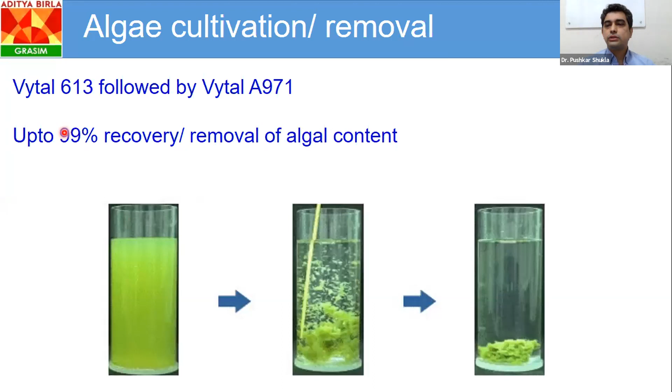One of the key criteria in this particular application is that the chemicals being dosed should not come out with the algae. It should not impart any change in the structure of the algae, otherwise oil removal becomes difficult. We were able to achieve that, and now it is under evaluation, and shortly we will be having a full-scale trial for this.

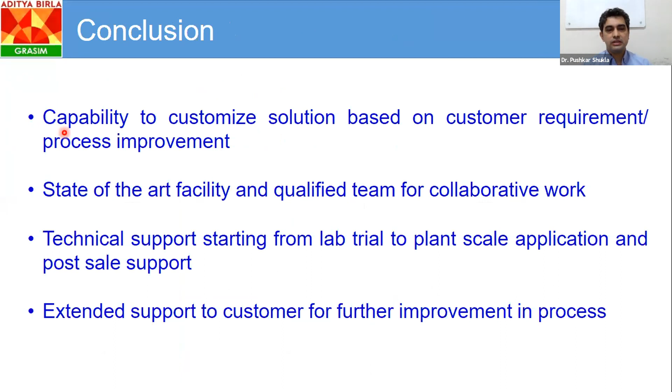So to conclude, we have the capability to customize solutions based on customer requirements, and we have a state-of-the-art facility. We are open to collaborations, and we always have technical support—what is best for the customer is what we always focus on. So thank you very much.